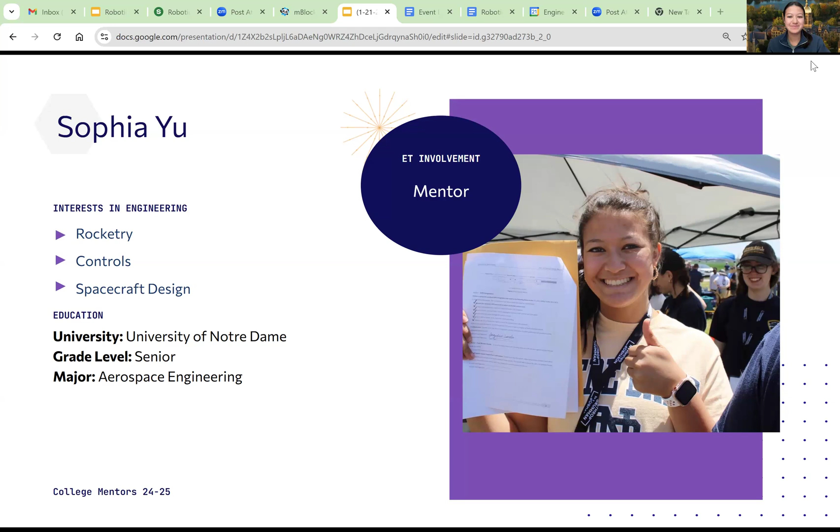Next slide, please. Excellent. Yep, got it. Hold on. There we go. Thanks. All right, so just a little bit about my engineering timeline.

So I graduated high school in 2021, so kind of a long time ago. I'm from Findlay, Ohio, a super small town in Northwest Ohio. I went to Findlay High School. In high school, I had no idea that I wanted to do engineering. I was pre-med all the way up until my senior year of high school. So I did a lot of volunteering activities. I volunteered at the hospital. I was in the biology club, the anatomy club, literally nothing to do with engineering whatsoever.

But then when I got accepted into Notre Dame in 2021, I decided to switch to aerospace engineering. I've always really liked space, and I kind of decided that I like space more than I liked medicine. So I picked aerospace engineering. One of the first things I did at Notre Dame was join the rocketry team here. Every year we design, build, and launch a rocket in one of NASA's student competitions. I've been involved with that all four years here at Notre Dame, and that's definitely my biggest engineering club. I have a lot of fun with it.

So in 2022, my sophomore year of college, I was doing rocketry. And I would say the highlight of my year was during the summer. I had an internship at a company called Maxar, a satellite manufacturing company out in California. I was working with their electrical development team, writing test scripts to test all of the satellites before they launched to space. That was really cool, and it definitely confirmed my passion for aerospace. After that, I was like, okay, I know I'm in the right field, and this is definitely what I want to do with my career.

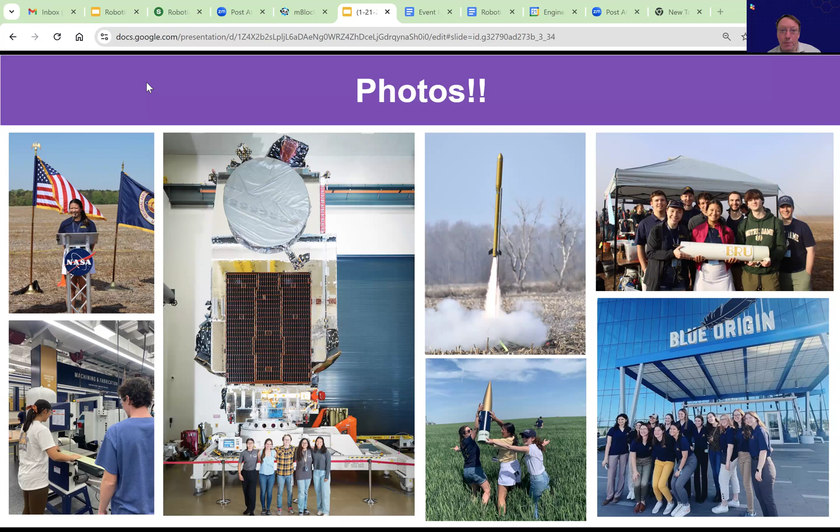Yeah, thank you, Pat. All right, so my name is Owen. I'm a freshman at Stony Brook University, and I'm a mechanical engineering major. Into aerospace, 3D printing, and robotics.

So right here I have a lot of my high school experience, given that I'm a freshman - I haven't been in college for too long, but I did just come out of high school. So you could see that a lot of the things I was into, it was a lot of STEM stuff. Unlike Sophia, I knew I wanted to do something engineering, math, something like that. So I was in the robotics team, I did chemistry club, I was in the math team, and I was taking a lot of AP classes in those STEM fields like calculus, chemistry, computer science, all that good stuff.

My school also had a media team, stuff like our YouTubes and socials, so I found myself with a leadership role in there, developing new things for the school and a bunch of stuff for that. So I also had that leadership opportunity there. In high school I really tried to put myself out there and do as much as I could to set myself up for success later on in college, which paid off.

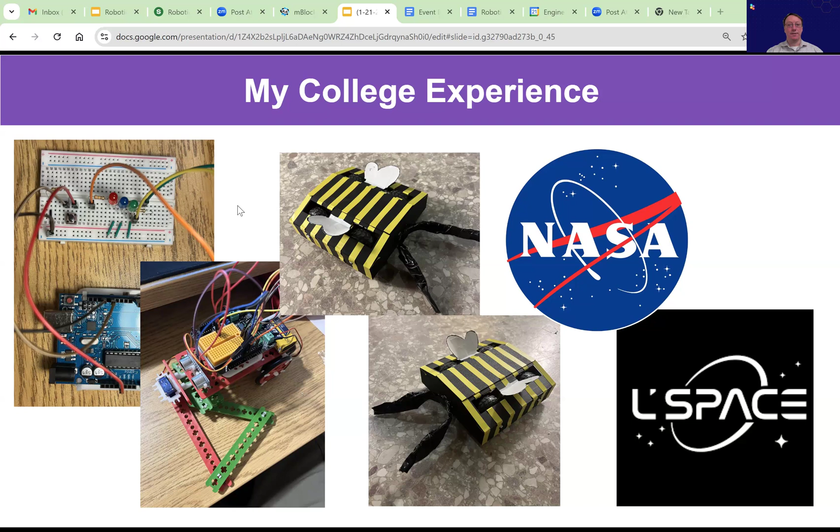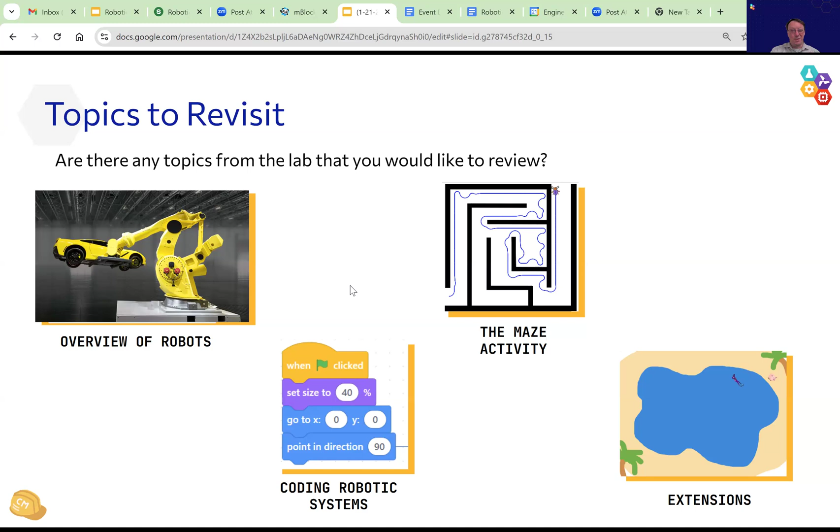By you guys, I mean the stuff that hopefully you were able to get involved in the time we had together—we talked about robots, and our hope is that you were able to use a bit of code to make some shapes. If you had an opportunity to do the maze, I think that'd be great. There were different backgrounds that allowed you to engage with it in different ways.

So let's ask you this question right now—if you don't mind helping me out, go to the Slido and let us know what kind of shape you started with. I feel like that would have been a good way to begin learning what to do.

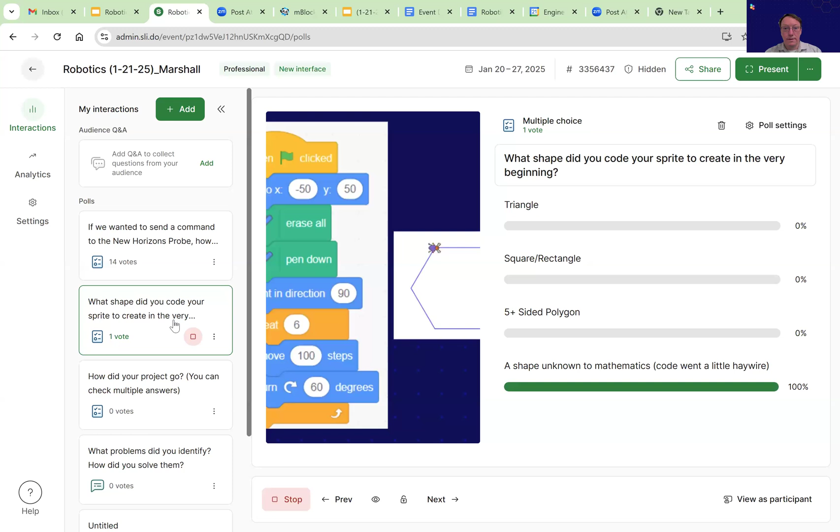You're muted. Thank you, oh my gosh, I was muted the whole time. Just for like the last 30 seconds or so. Yeah, no, I got you.

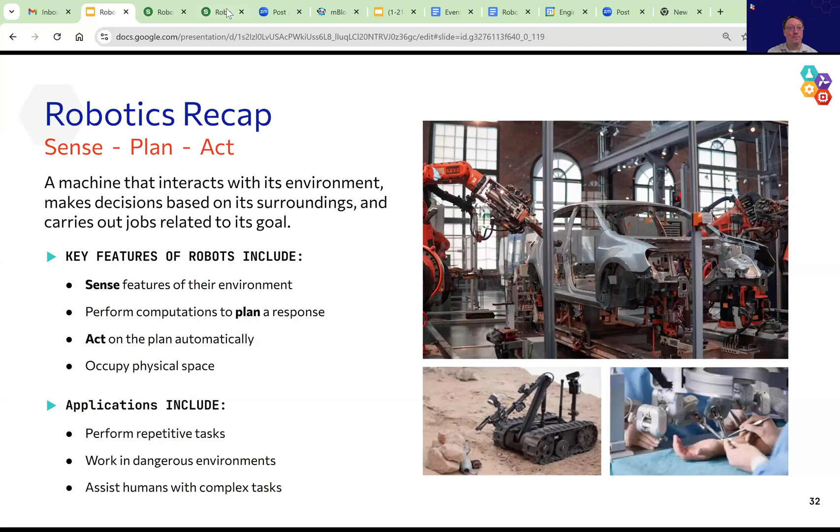So yeah, my hope is that if you take a look at the Slido, one of the first things you may have done is make a shape, and I'm curious to see where you started with. There are different ways to do it, and I would love to see what you guys came up with, because there are creative ways to make the same shape depending on how you went about it.

So most people made a shape unknown to mathematics. I did that a couple of times when I was playing with the code, that's for sure—try to make a very large-sided object, and you're like, what? That doesn't look like that at all. So we got some rectangles, some polygons, and things like that.

Five-sided plus—I guess we'd just jump past the triangle—but one of the things you had to consider was, okay, well what angle do we use? So that may have been something you played with and experimented with, because you weren't sure about it, maybe, and you're like, well I think it's 60, 120. But is it possible to see some of your code? Can any of you share with us what you have out there?

Teachers and students, is it possible to do that? Yeah, not to put you on the spot, but Archbishop Stepinac, I see you here—we had a few classes that said they're taking lunch right now, they're gonna come right back, but I see you're here, and I think you were active in that breakout room we heard. So not to put you on the spot, but if you have any brave volunteers to come up and talk us through the process, we would love it.

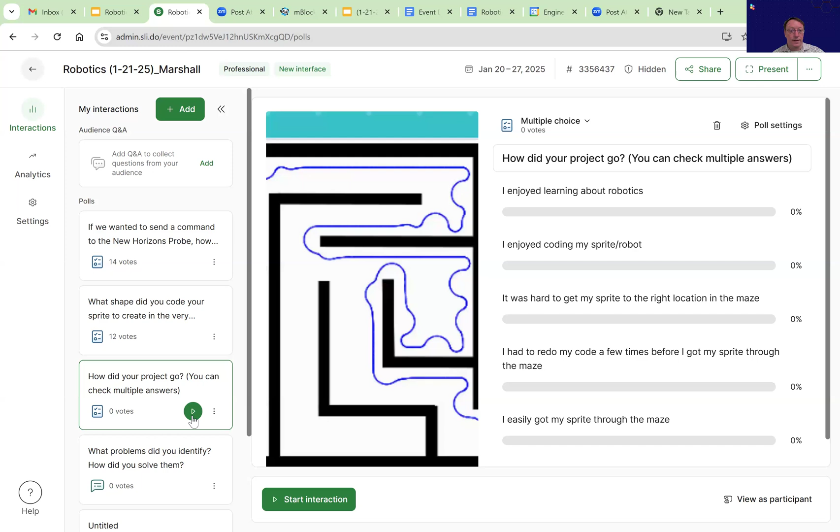One of the things, I know we had a few projects for you guys to involve yourselves in, but hopefully you saw the landscape—you could do so many things with this. I feel like coding is like being an artist with an infinite number of paints to mix and match, just make whatever you'd like. So let us know, it was hard maybe, some of the challenges you have are what we all have, so there's no shame in that. Some of you easily got my sprite to move through the maze, that's pretty cool.

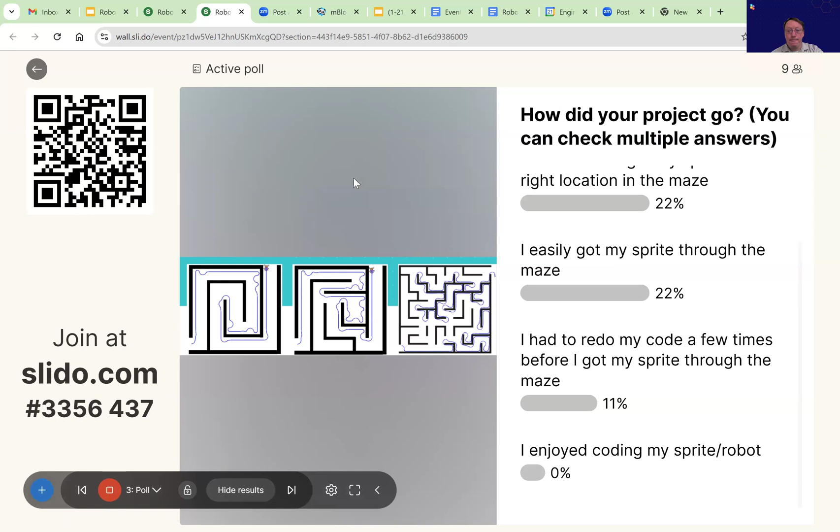So yeah, thank you for jumping in on a few of those questions. Does anybody want to share what they did? It seems like some of you did a great job navigating the maze or making your shapes. Does anybody out there want to show us a little bit of your code? I would love to see some of that creativity out there.

Yeah, and it's your lucky day. Don't be shy, we have a small crowd here because of the weather, so it's just us and Pat and Sophia and Owen. We won't bite, so feel free to come up and talk with us.

And if not, I will ask, I promise, final question. Especially Sophie and Owen, while we have you, and you're just a few years older than our audience here in high school, what's some advice you have for them when it comes to thinking of their future major in college or career pathway they may want to take?

I can start with this one. That's a great question. I would say my biggest piece of advice going into college is don't be afraid to try new things. I know it's pretty cliche, but the more things you try, the more you're gonna know about yourself, and the more you're gonna learn what you like and what you dislike. I've had a lot of friends that have said yes to internships even though they didn't really want to, and they've ended up really loving them. I've also had friends who have tried a club and realized they hate that. So anything you do is going to give you more information about yourself and will help you decide what you want to do later on in life.

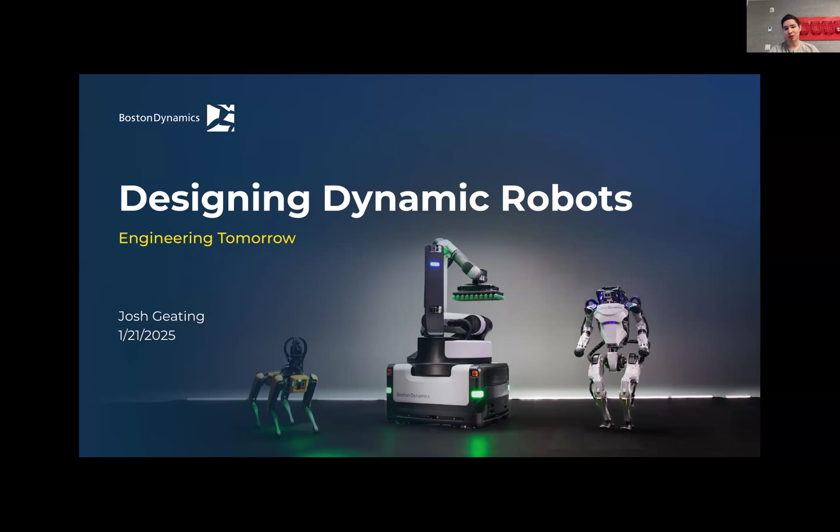Like Pat mentioned, I work for Boston Dynamics on the Atlas team. You guys have been doing a lot of work learning about the software of these robots. I work on the hardware team, so I'm really excited to show you a little more about the other giant half of robotics—designing the physical robots, designing the parts, and integrating it all together. That's what I'll talk about today. Before I jump into the presentation, I wanted to show a brief video to give you an idea of what types of robots we build at Boston Dynamics, for those of you who aren't familiar with our work.

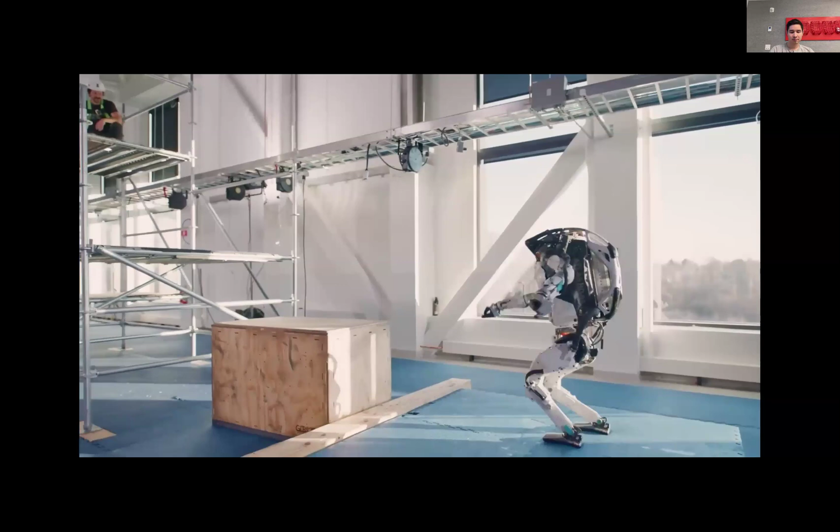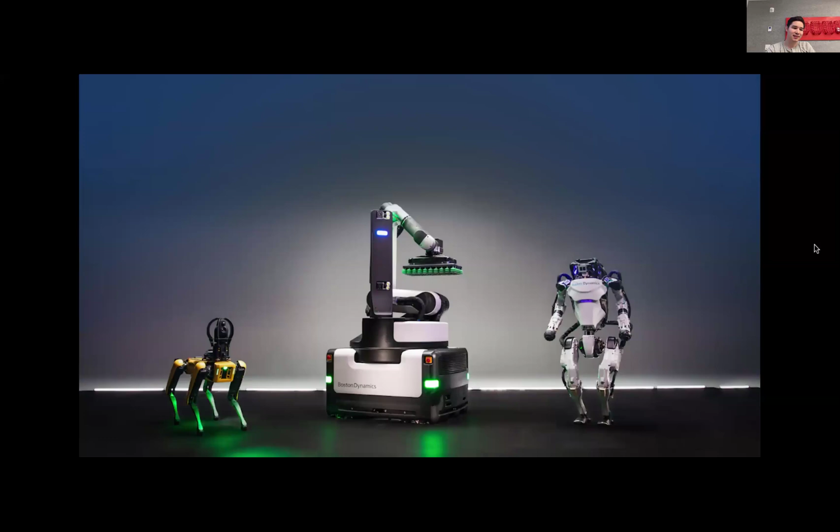Alright, so hopefully that gives you a little bit of idea of what we do here at Boston Dynamics. We design, build, and program highly dynamic robots that have arms and legs, robots that move very quickly, very precisely. A lot of the world is aware of us from the elegance with which our robots move.

They look very biological, very fluid, and that's something we take a lot of pride in. Before I jump into talking about BD, I want to give you an overview of what I'm going to talk about, then jump more into my background. I'll tell you about my personal journey from childhood through to working here at Boston Dynamics, a little about how robots work, more focused on the hardware side. I'll tell you about the day-to-day of a mechanical engineer, what our 9-to-5 looks like, and then some lessons learned and observations from my personal journey and career.

So I'm going to rewind way back to my childhood, my background. That's a big part of who I am as an engineer. Then I'll move more into Boston Dynamics stuff. I was one of 5 kids, grew up around a lot of noise, a lot of chaos, a lot of fun, a lot of laughter, a lot of crying and tears.

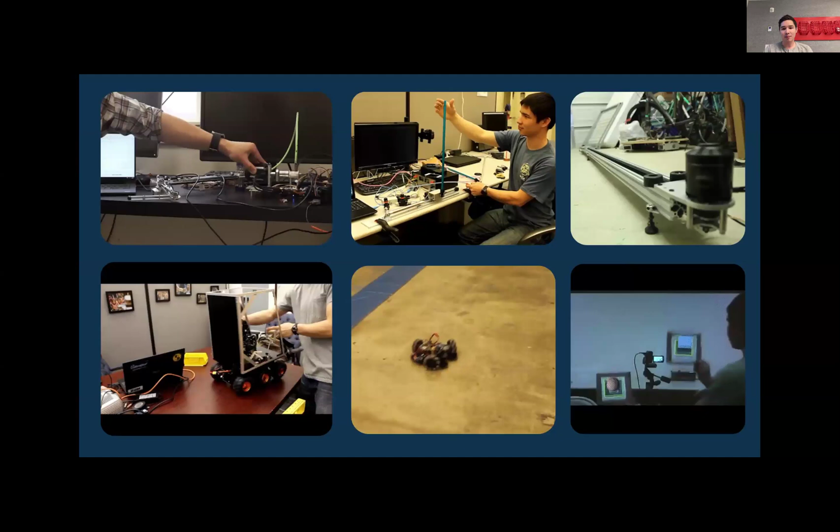Going from high school to college, even though I worked hard in school, I wouldn't say I was incredibly motivated to go to college. I was kind of rebellious and felt like going to college was conforming. So I didn't apply to many schools, I applied to two schools. One I didn't get into, the other I ended up going to, Drexel University.

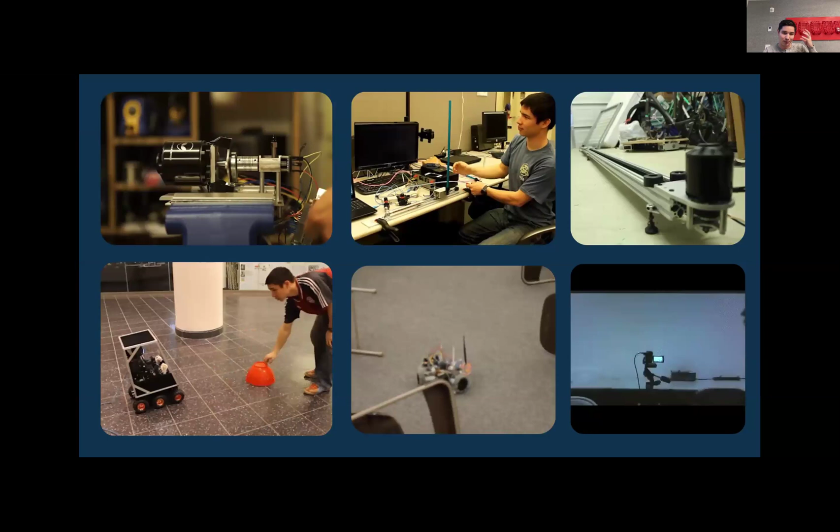But once I started there, my first year, that was when I really started falling in love with robotics. A couple projects I did while there, building a drone, building a couple other small robots. That was the first time I really delved into the full stack of building a robot, designing the hardware, doing all the electronics and wiring, and like you guys were exposed to today, also doing some of the software and programming. Seeing all those three aspects come together, seeing the robot come to life, respond to some of the conditional statements I had programmed, that was my big aha light bulb moment where I felt really empowered to think of something in my head and then create it and breathe intelligence into it.

So in college, I just spent a ton of time using every excuse I could find to do projects. I would turn my independent studies into research projects where I would design robots like these ones down here, and use every opportunity I could to compete in competitions and whatnot.

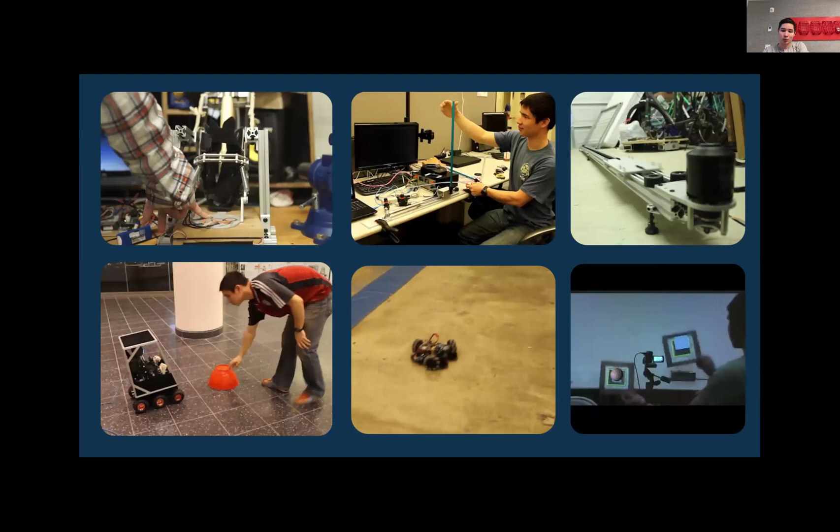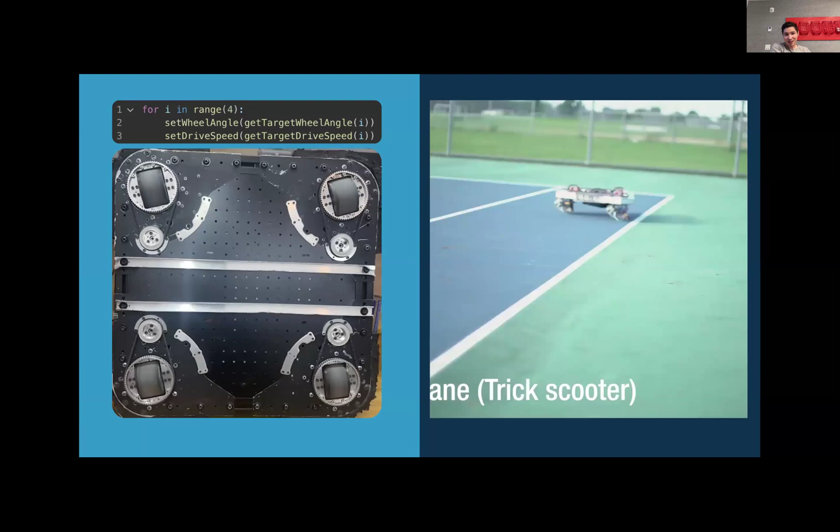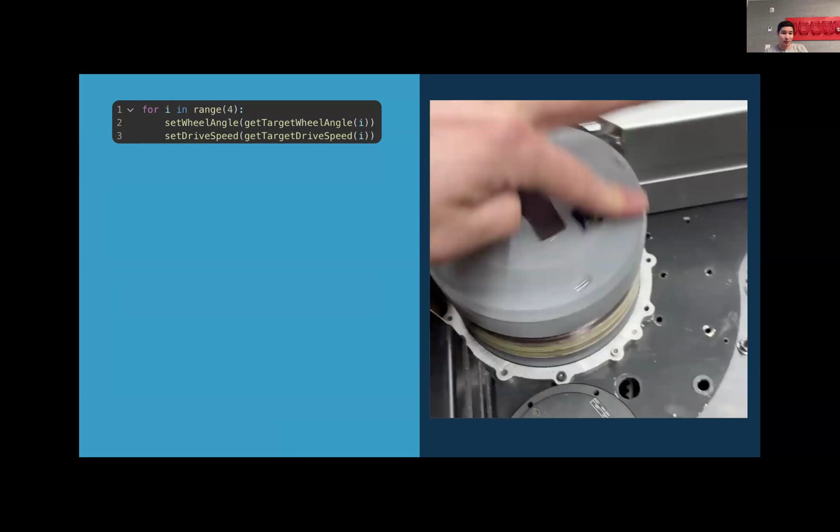So I did want to take a moment to talk a little bit about projects in general, side projects. I think that's a huge part of every engineer, whether you're in high school like you guys are or in college, figuring out what you want to do with your life. Projects are a great way to really understand all the problems you would never even think about. You're learning about math and physics, and that stuff is really hard and complicated, but you might not be thinking about communication protocols for a robot, or what does a ball bearing do, or how do you go from code on a page to robot moving in the world. So side projects are a really, really good way to do that.

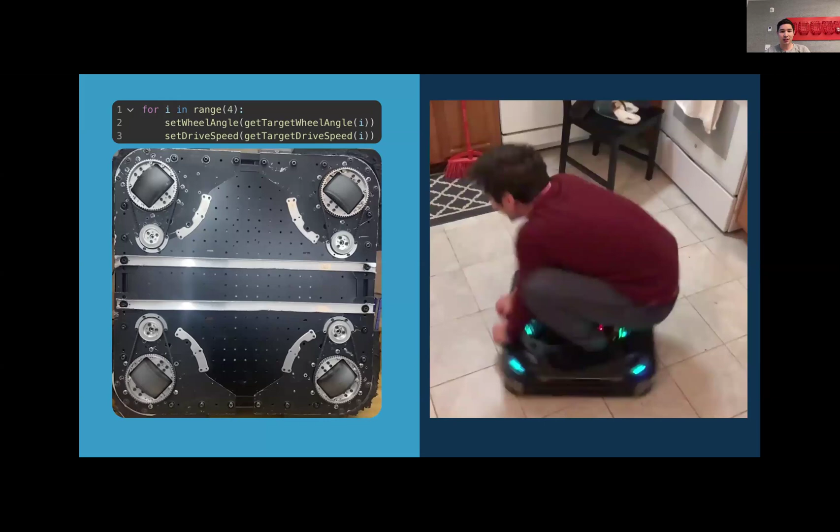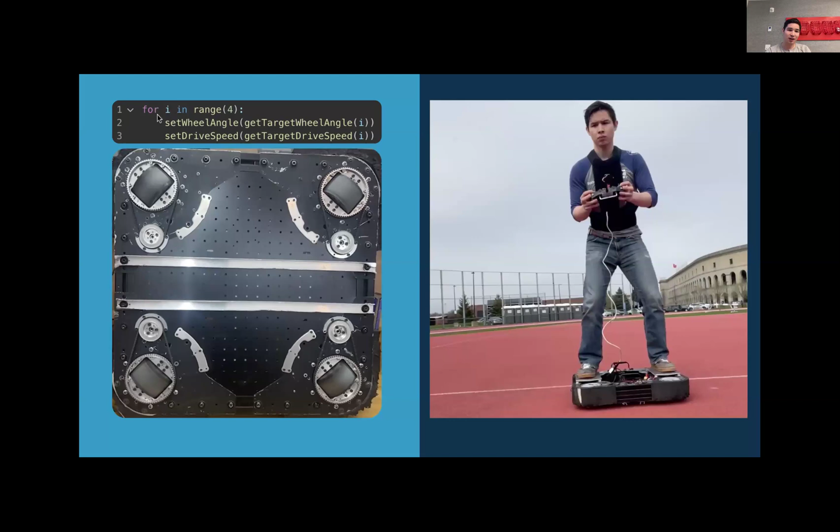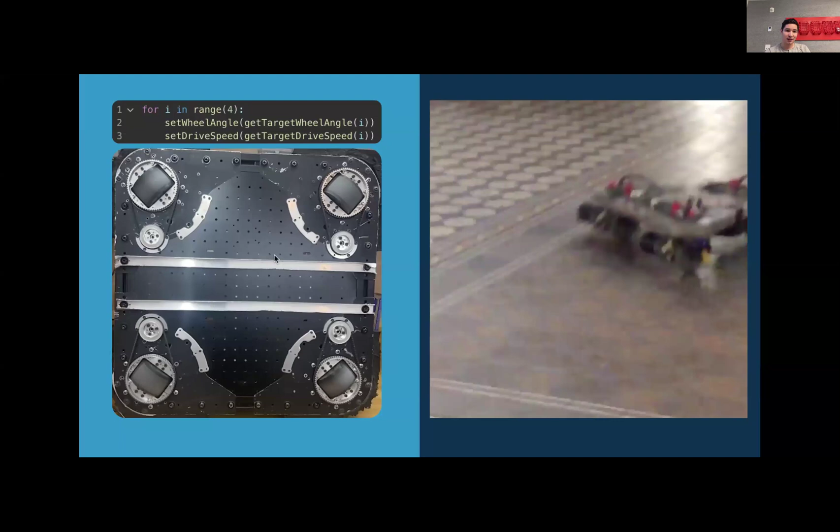And I also wanted to just show an example of a couple lines of code. So you guys did some block programming today, which is a little more graphical, dragging things and dropping them. These 3 lines of code here are an example of some Python code that's fundamentally the same thing that you guys are doing, programming loops, getting stuff to happen in those loops. And this is it being applied to this robot here, this side project, I call it Penny, in order to get it to drive around in the world like you're seeing here on the right.

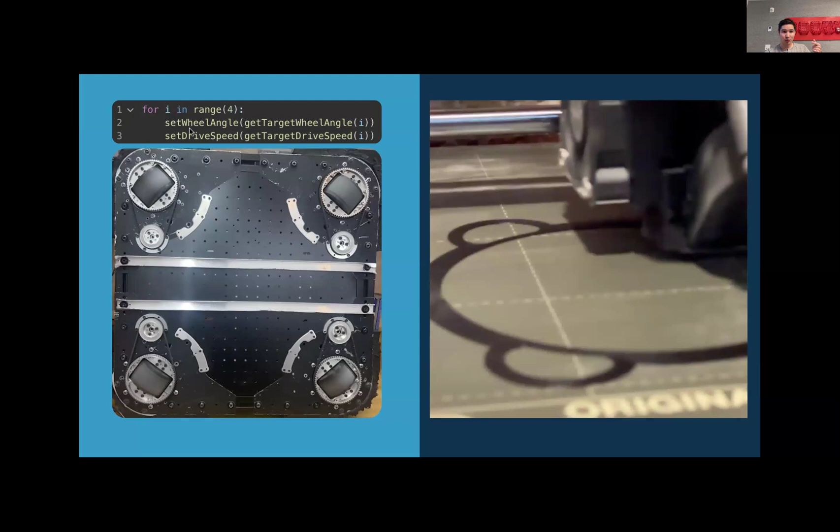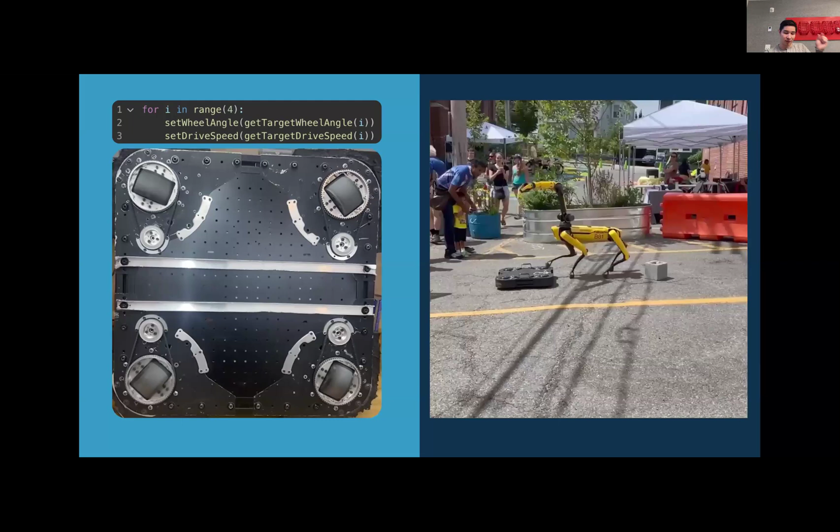So we have a loop right here for i in range 4. This is just looping from 0 to 3, so there's 4 different numbers there. And then in each of those loops, we set a wheel angle, which is this little motor right here, aiming the direction of the wheel. And then we set a drive speed, which is setting the rotation speed of this wheel. So this is real code that actually runs the robot. It's just showing that even though you're doing the fundamentals today, it really does map to how robots work in the real world.

From college, I got a really cool internship that launched me into my first job at the Naval Research Laboratory. I worked on the spacecraft mechanisms group. That group is responsible for designing parts on satellites that move, things like hinges and deployment mechanisms. You can imagine a solar array that unfolds.

At the Naval Research Lab, I really learned a lot of the hardcore fundamentals of engineering. I had done a bunch of side projects where I built robots that did cool things, but when it got into satellite engineering, that was just a whole new world of detail and rigor I had no idea even existed. Things like materials expand ever so slightly when they heat up and get cold, and accounting for that thermal expansion is super critical for designing satellites. Outgassing, designing for fatigue instead of just brute strength - a lot of really, really good fundamentals. I'm super thankful for learning there.

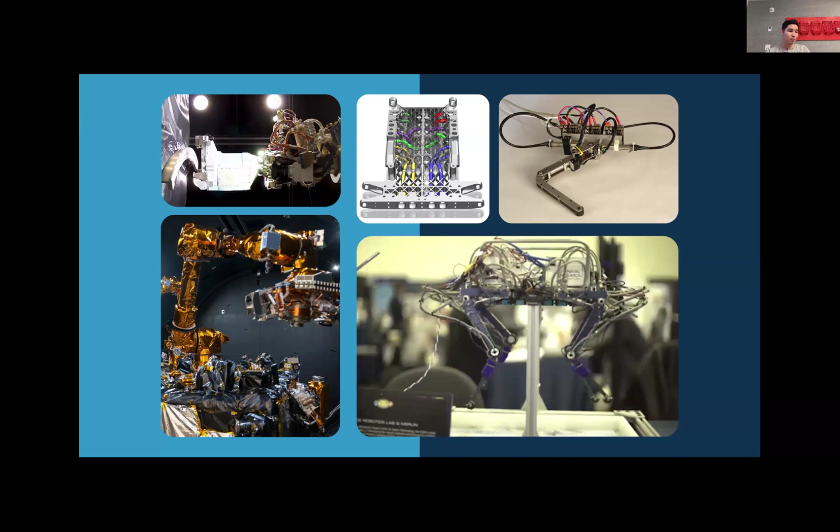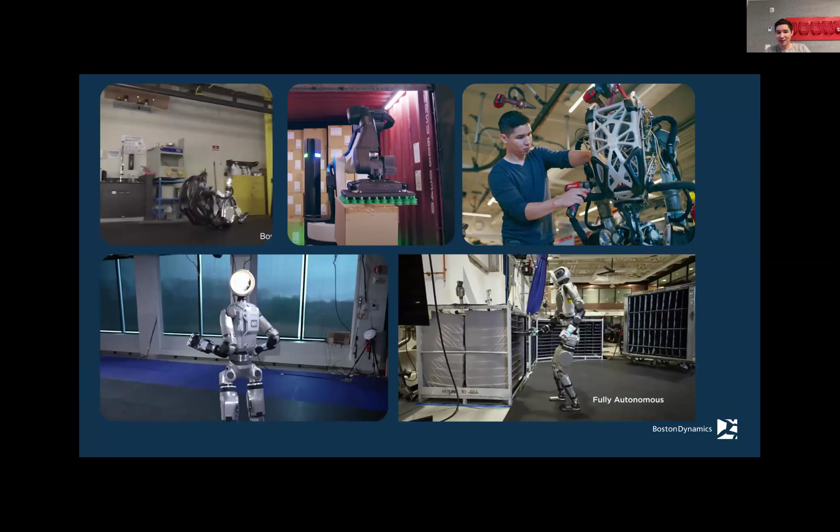That kind of launched me to Boston Dynamics, which is the job I'm currently at. I've been here about 6 years, and it's been a really great time. I'd say the first half of those 6 years was just kind of like a kid in a candy store doing really, really fun projects.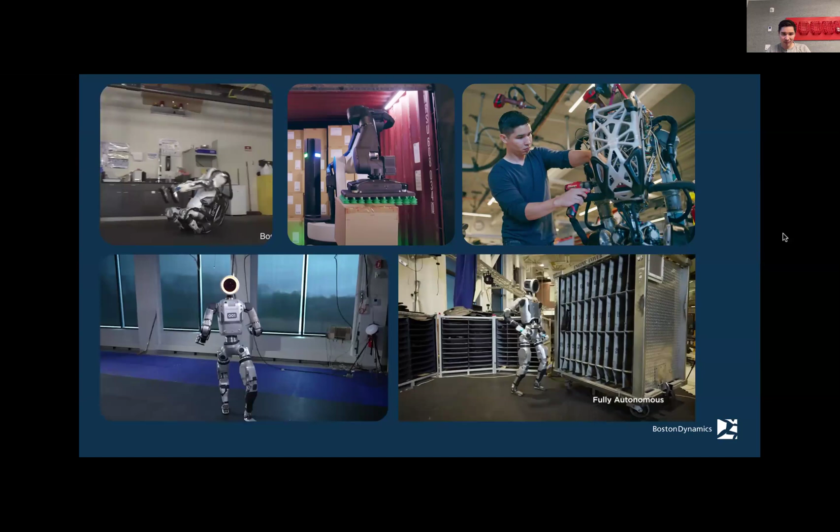I was part of a small team, maybe 5 or 6 of us, on the Atlas team, designing upgrades to the robot you've seen all around YouTube, and upgrading some parts to be stronger or have a little more power in the battery. A lot of fun there.

I worked on Stretch for about 1.5 years, designing the smart gripper, we call it, which is meant to pick up boxes and individually actuate these suction cups.

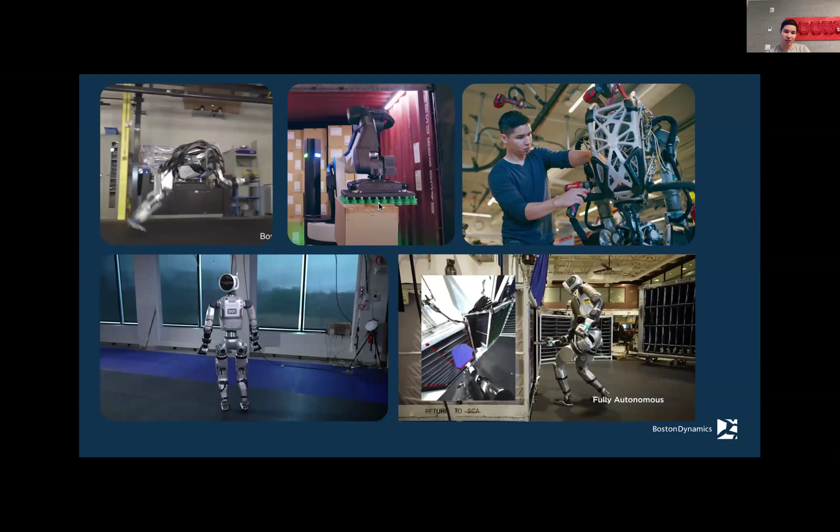But then the last 2 or 3 years-ish, the company kind of pivoted Atlas in a direction more towards production. And that marked a pretty stark change in the type of work I did and the type of interactions. And that led to a bunch of hires, a much larger team size, a ton more factors to think about when you're designing a product that is going to be in the world versus a research and development prototype like the hydraulic version of Atlas there.

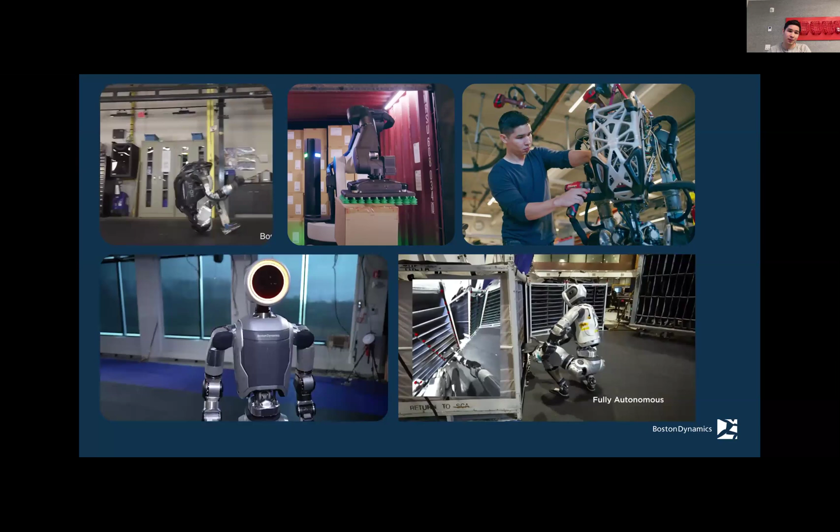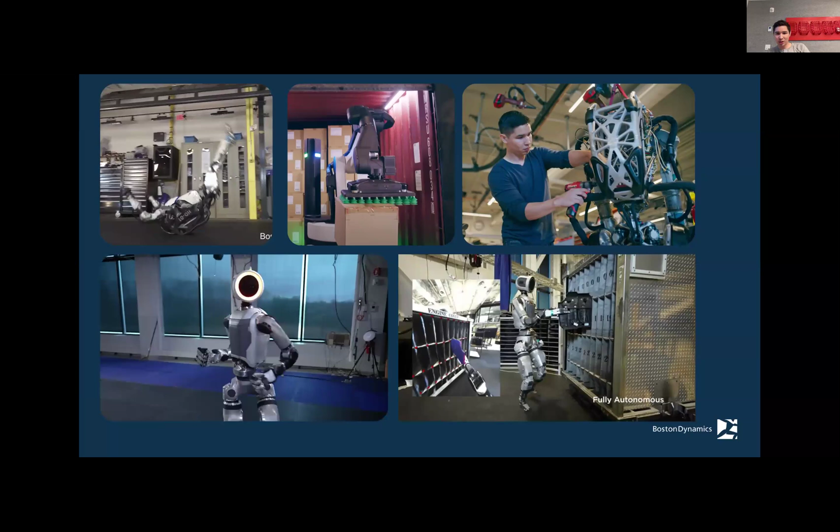So that was obviously a big change for me. And I'd say probably the biggest change was not so much in the technical work I was doing. There's still a lot of really hard problems to solve. But it was more so in what it means to work as a team.

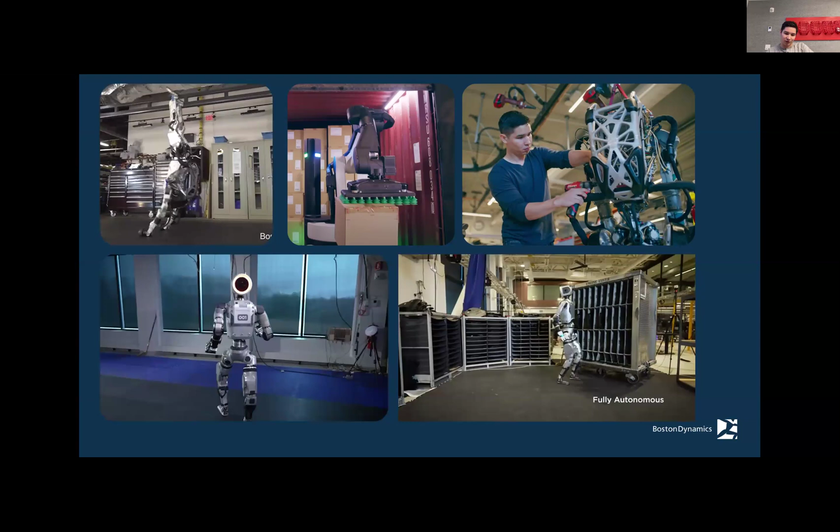We went from 5 or 6 people to 15 to 50 people over the course of a matter of months. So I really learned a lot about what it means to collaborate and what it means to listen.

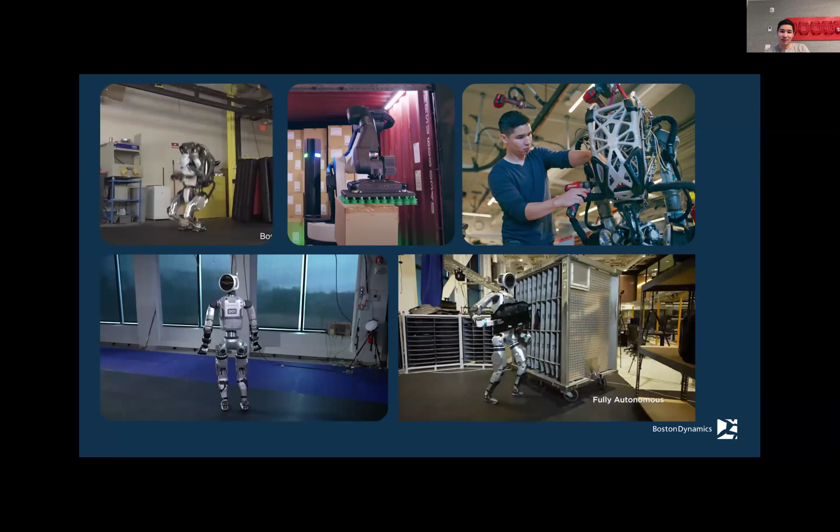And so I just wanted to take a little bit of time to mention that teamwork, in the way you interact with your coworkers, and for you guys, the way you interact with your classmates on projects and just in life in general, is really, really important.

Because when I arrived at Boston Dynamics originally, I was just like, I'm here for the robots. They're awesome, super cool technical stuff. That's still the case, I love the robots. But what is really the most compelling thing now is working on an awesome team and having great coworkers and really designing robots like a family.

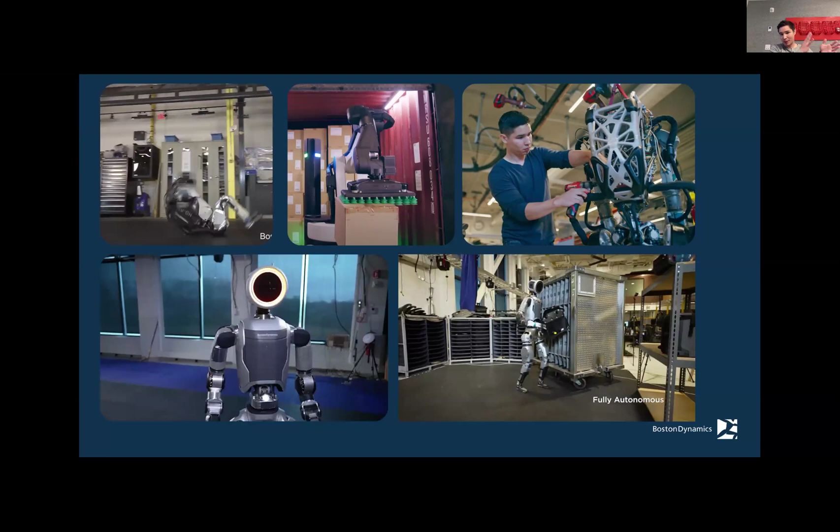There's just a couple more things I'll get into later, but shifting from that technical to more focus on collaboration and how to work as a team has been the past couple of years here at BD.

But let's move on a little bit. I want to talk a little deeper about technical stuff now. So I figured I'd start by telling you guys about the anatomy of a robot.

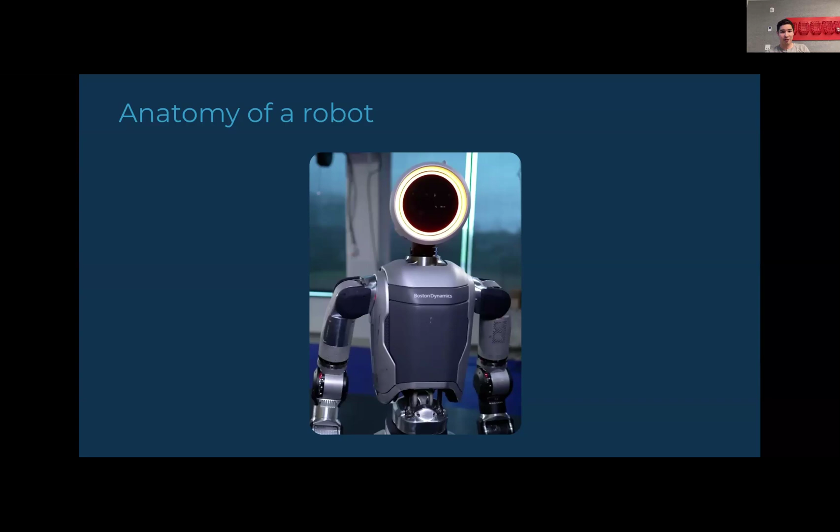So you went ahead and programmed some sprites that move around on your screen. When it gets to the real robots in the real world, there's a couple key ingredients that they all have. One of them is a computer. So every robot that wants to move in the world autonomously needs a way to make intelligent decisions. That can be anything from deciding where you're going to place your next foot, or deciding the path you're going to fly if you're a drone.

Or picking a route on the ground if you're a vehicle. High-level decisions about taking in instructions. It can also be lower-level decisions like, am I going to have my elbows oriented like this or like this? And how am I going to support the weight of an object and not tip over?

Another really important aspect is sensors. So you developed sprites today that are trying to follow walls and take turns. A big part of our robots is being able to make decisions based off the environment around them. This is an example of a stereo camera that gets both visual data as well as depth data to see how far away things are.

There are other sensors like force sensors that might sense when you're pushing on an object, how heavy it is or how soft an object is. There's sensors like an IMU, an inertial measurement unit, that measures the angle of a robot. So all those sensors are really important to let our robots move in the world intelligently when there's disturbances, when there's debris on the ground, not fall over, and be successful in their applications.

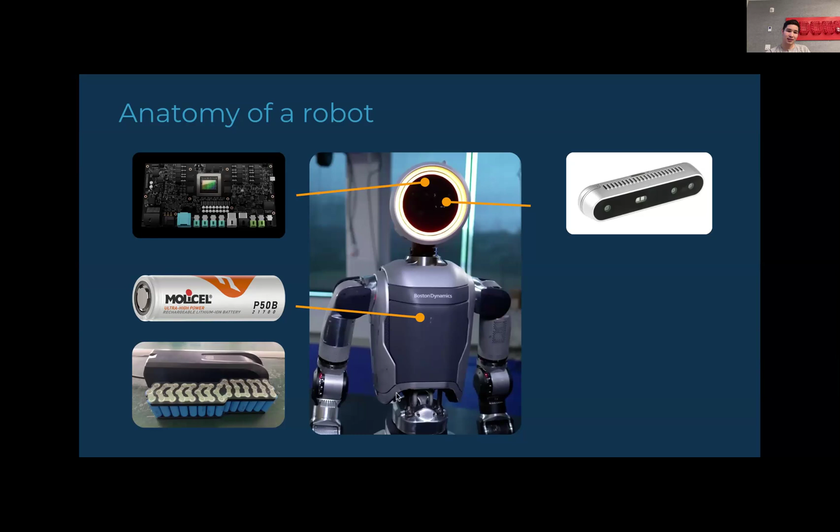Just like your remote control might have two batteries, we put dozens and dozens of these batteries in our robot to give a battery pack that meets our power requirements, lasts long enough, and meets the voltage requirements we need. That's what lets our robot not be tethered to a wall and walk around where we want it to.

And then lastly, a really big deal is the actuators, which is our word for a combination of the motor and the gearboxes that let our joints move on our robot.

So here's an example of a rotary actuator. They're used in our elbows, shoulders, all over the place. The majority of these actuators on robots are rotary, as the name would imply. They spin just like your elbow bends.

But some of them are also linear, so they do push-pulling. For example, the ones here in the back are push-pull actuators that let the robot also tilt its back.

So that's kind of the basic anatomy of a robot. If it's a wheeled robot, instead of these types of actuators, you might just have a motor that spins a wheel, or for a drone, it might be a motor that spins a propeller. But you can kind of still boil things down to those four components.

And then a little bit, you guys learned all about software. I felt like it would be good to also talk a little bit about the control side of our robots, because that's super important. And while I'm on the hardware team, I can speak a little bit to the software that runs on our robots.

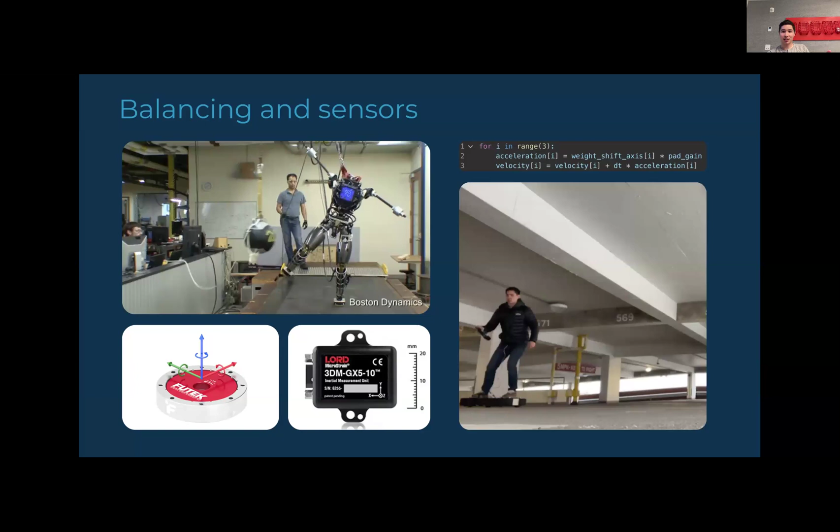And this is an example of some real code that, in this case, I was using the weight sensors on the foot. I would sense where the weight is, say 100% weight on the left foot, and I would command an acceleration of the robot. So just like you learned in physics class, acceleration means you're speeding up or slowing down. Based off of the weight shift of the pads, I would speed up or slow down. In this case, I'm slowing down. And then I convert that into a velocity of the wheels.

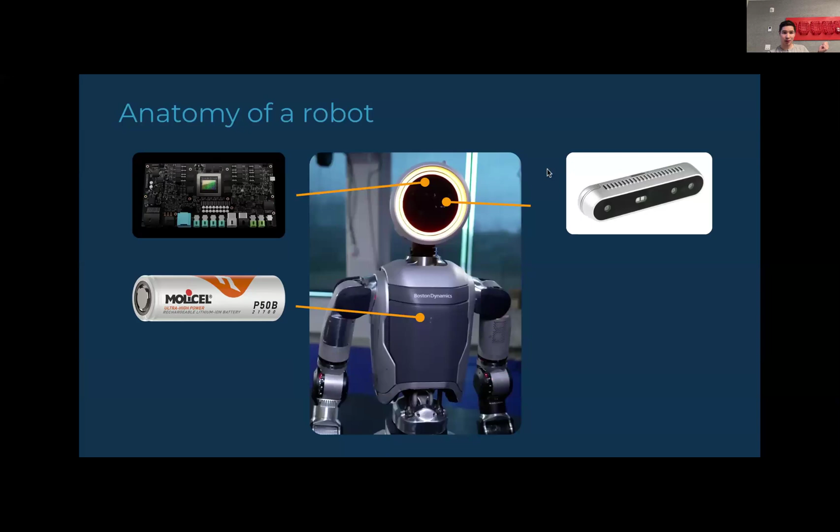And you may have remembered in that one up here, we command a wheel motor, set drive speed. So that's an example, again, of using sensor input to command a robot motion that works in the way that you intend.

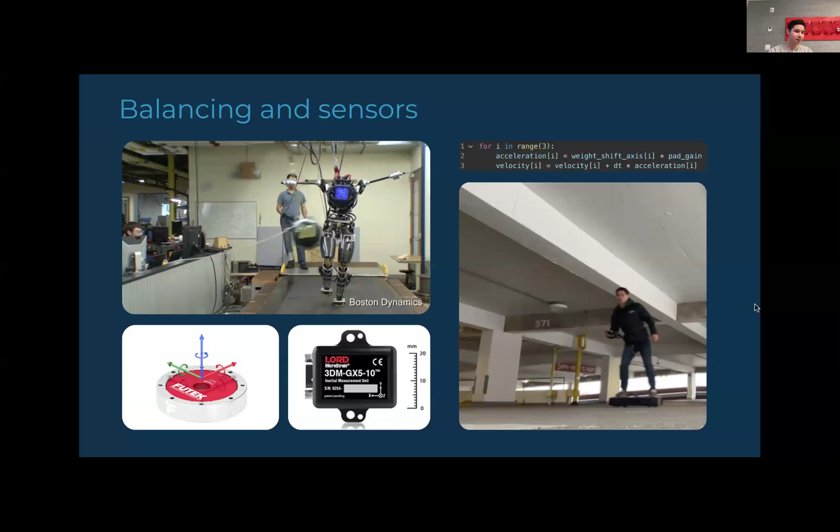All right, so we're going to move into the last part of the presentation, which is talking a little bit about the day-to-day of an engineer, the types of things that we do, and a couple lessons learned from that.

So I'll first speak about design and 3D modeling, which is a big part of what mechanical engineers do. When you see one of these robots on screen doing these things, that all started as some idea in someone's head. And a big part of going from idea in your head to physical robot in the world is being able to get those ideas on paper or on a computer screen, so 3D modeling is a big aspect of that.

So that's a big part of mechanical engineering, is the design. Another really big part of it is how these designs develop from when it first enters your head until it goes out to be fabricated and made. And these designs are super complex, as you might imagine. And one thing I really wanted to emphasize was how do these designs evolve from an idea all the way through.

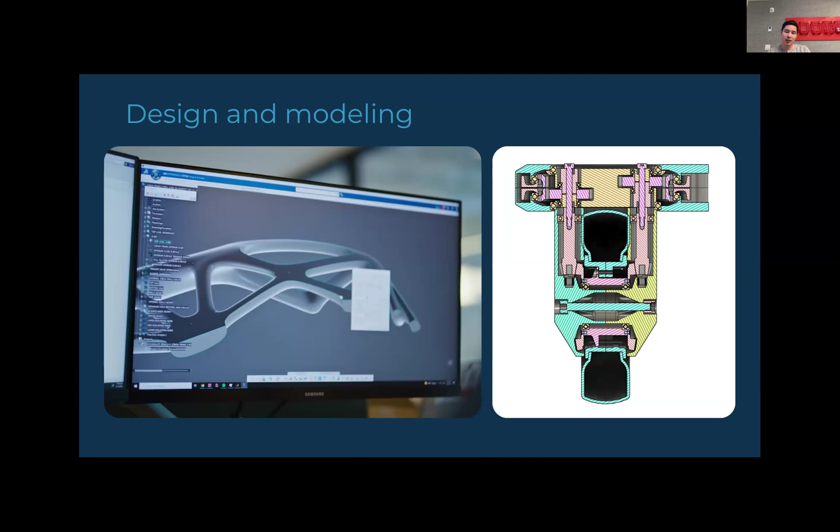You do have to make progress, so you're not just going to listen to everything, but really the way you treat people kindly and generously in these design reviews is super important. So as you're working in projects with team members and figuring out how to work as a team, I would just really encourage you to take feedback that you receive graciously, and then give criticism kindly in how you're interacting with people. And I can't tell you how many times the design I've owned has just totally morphed from the thing that I imagined into something that's so much better, because the input from coworkers is just really, really helpful.

I think the one thing I wanted to say about using math in class versus on the job, this is a little bit of a personal take, but I felt like in high school and in college, you really went through the rigor of learning how to take a derivative, or learning more fundamentally what sine and cosine means, or solving a bunch of algebraic equations. On the job, there's not as much of actual solving these equations. We have tools and calculators, fancy calculators that do that all for us now. But gaining that intuition, really understanding concepts like derivatives and integrals, is really the important thing.

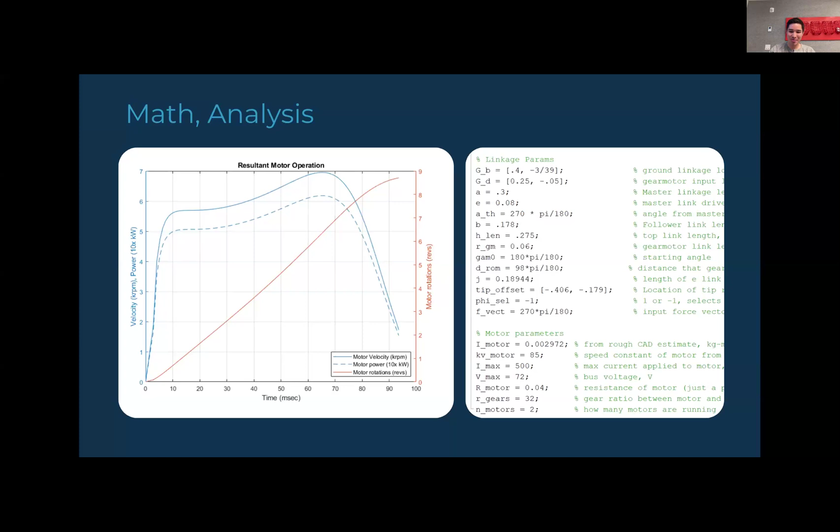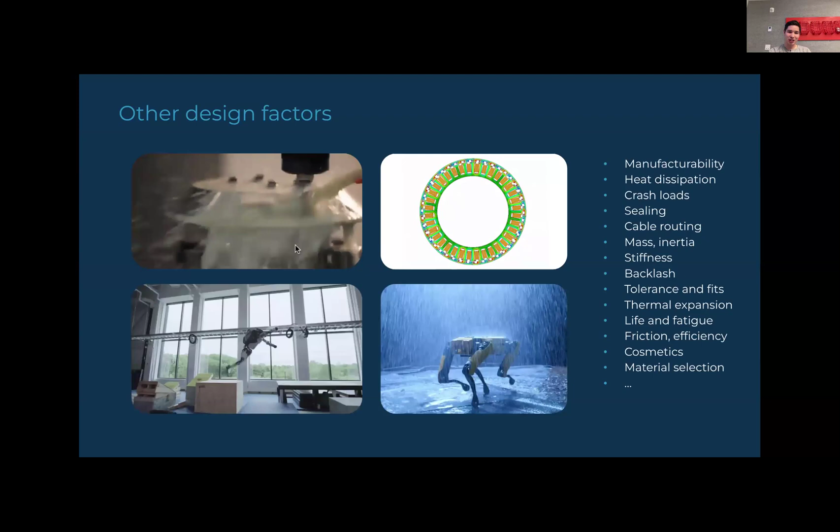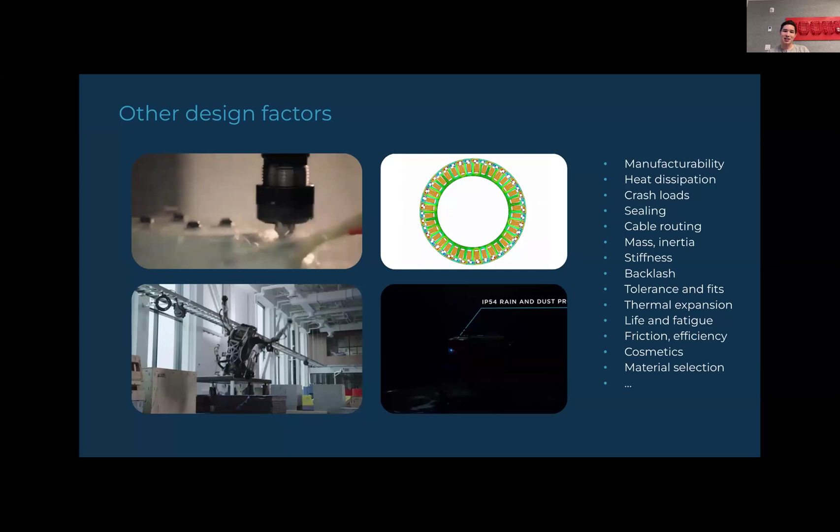There are a ton of other really fun design factors—I just mentioned two. A couple more, and there's plenty more, are manufacturability: how do your parts get made? Working in machine shops will teach you a ton about how to actually go from a theoretical idea of a shape in your head to actually making it. Thermal management—our human bodies are incredible. Biology is incredible at managing heat, dissipating it through things like sweat.

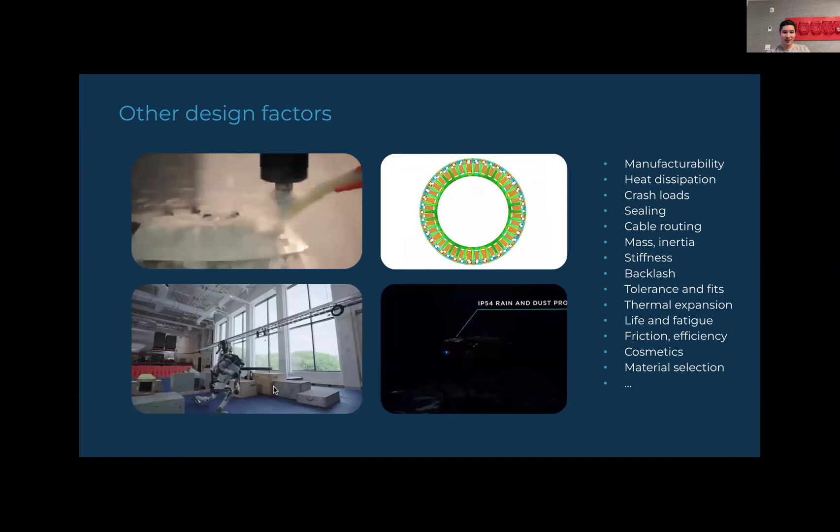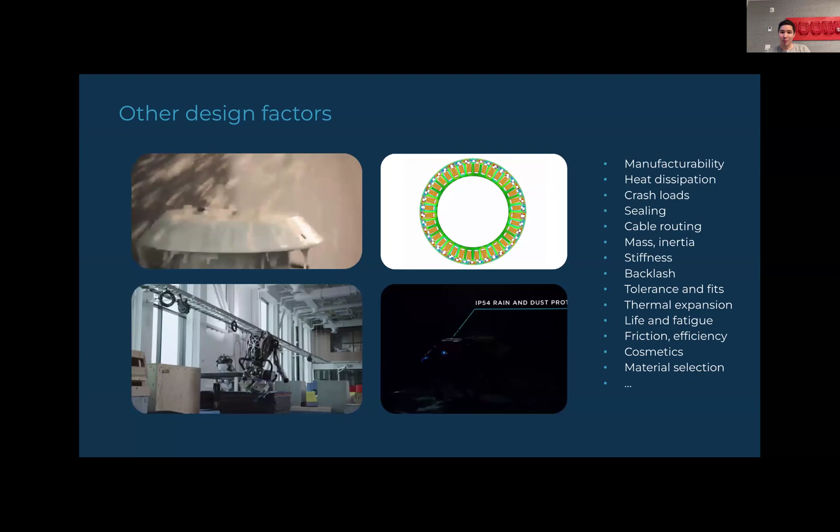Crash loads—this one's pretty fun and unique to legged robots. We do all these crazy backflips and fall over, and designing structures that can withstand those impacts is really hard. Even knowing what level the impacts of force are going to be at is really hard. One more I'll mention is sealing—we want our robots to work in all sorts of environments. If they're being rained on, we want our robots to still operate properly. Those are just a couple snapshots of the other things we think about, and there's a ton more I'm not going to go into. But as you spend more time engineering, you learn more about these topics and apply them to your designs.

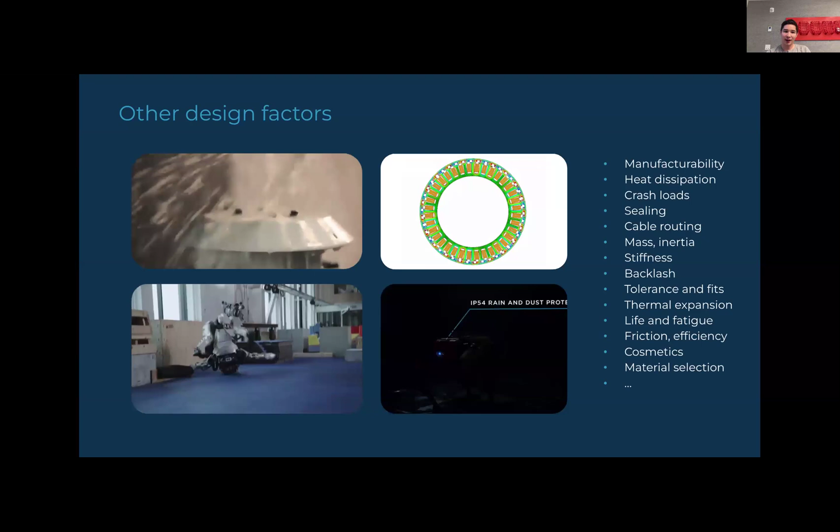This is the last slide I had, and it's about testing. So you design your robot, you build it—which I'm not going to get into manufacturing here—but the next big thing is to go out and test your robot in the wild. I'm going to show a brief video here showing a couple of the highs and lows of what testing really looks like.

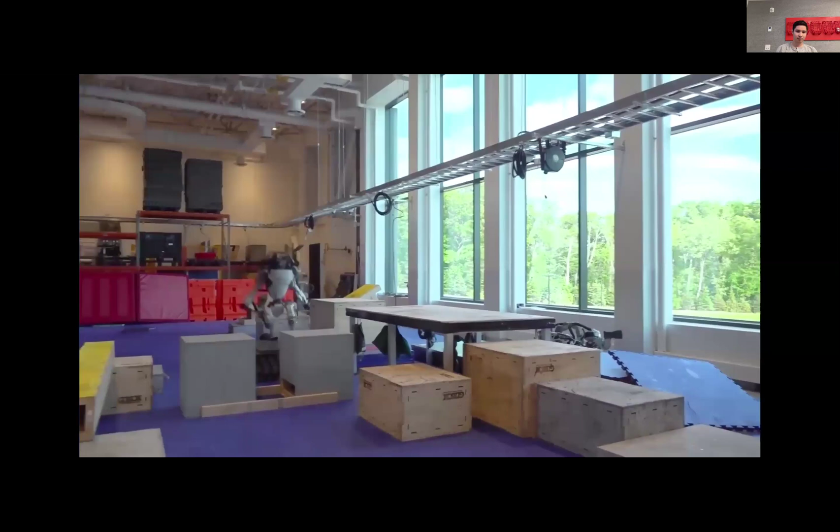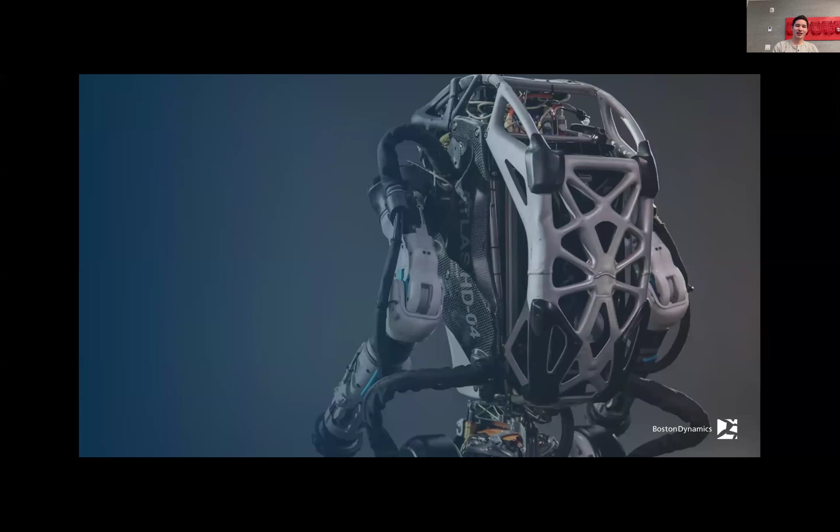So hopefully that gives you a little snapshot of what it's like to develop robots in the wild. There's a lot of failures, a lot of successes. I remember one of our biggest recent successes was just a couple weeks ago—it was the first time our robot did a backflip. You had about 100 of us gathered around, and the first attempt to do the flip totally nailed it. That's the first time in my career here that we've done something at that level of complexity, first time on hardware, and it just worked. It was amazing.

So there's a lot of really high moments like that, and there's also a ton of really hard moments of failure. I find that actually a lot more interesting—thinking about failure and how to deal with it. I've had a lot of personal failures, the teams have had a lot of failures, and what you do with the failure, I think, is a lot more important than the failure itself. They keep you humble. If you learn from a failure, I would consider that actually a pretty big success. Really responding to it, leading you more toward curiosity than fear, is really essential. I'm sure you guys all have a lot of good successes and failures ahead of you. That's just my take on that.

A couple other things—just some random rapid-fire lessons learned over my career. Time management is super, super critical. I found that when I was able to get things like Netflix, doom scrolling, and gaming under control, my rate of learning absolutely skyrocketed. So managing your time, being able to put a lot of work in, is really, really helpful. This is a pretty common one, but following your passions is critical. I was really fortunate to have a career where my personal passions really aligned well with the type of work we do. Not everyone is that fortunate, but I just encourage you to explore that for yourself and figure out what you want to love to do.